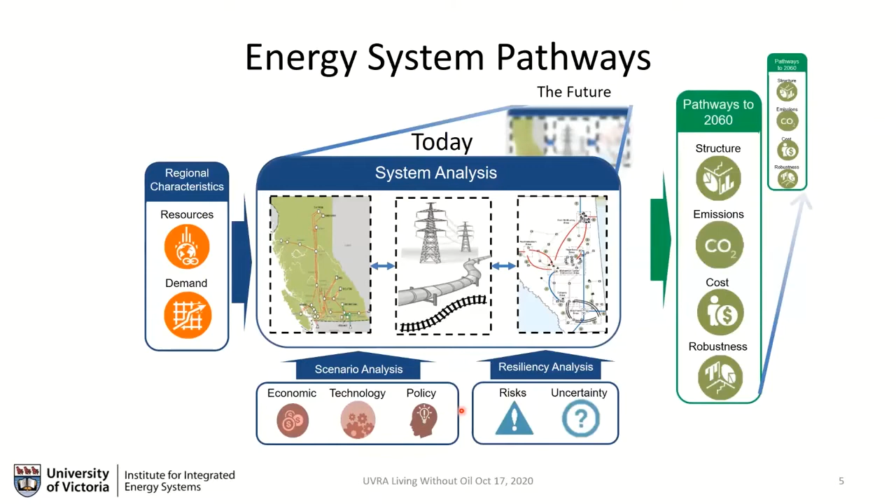And then we use some fairly complicated models to say what happens when I want to go to the future and I want to get to some future state with some defined constraints around options that are available. And what we would like to get out of this is some idea of what the emissions look like, what's the structure of the energy system, and how resilient is this structure that we think we want to build, and of course what is the cost. And cost is just one aspect of the value or the benefit that we might get.

And the unique aspect about electricity as compared to some other currencies or some other vectors for energy and materials is this need for this nearly instantaneous match of supply and demand. So I'll come back to this again. This is where storage obviously falls into the equation.

So then we need to think, okay, if this is what people want, how do we deliver it? And we need to start to characterize the behavior. What is this demand like? And the idea is basically what we build that goes from our switches in our house back to the generation, we don't start at supply, although that's the direction of flow of energy. Really, the system is built to reflect what the demand is, or at least it should be if you're delivering what people want.

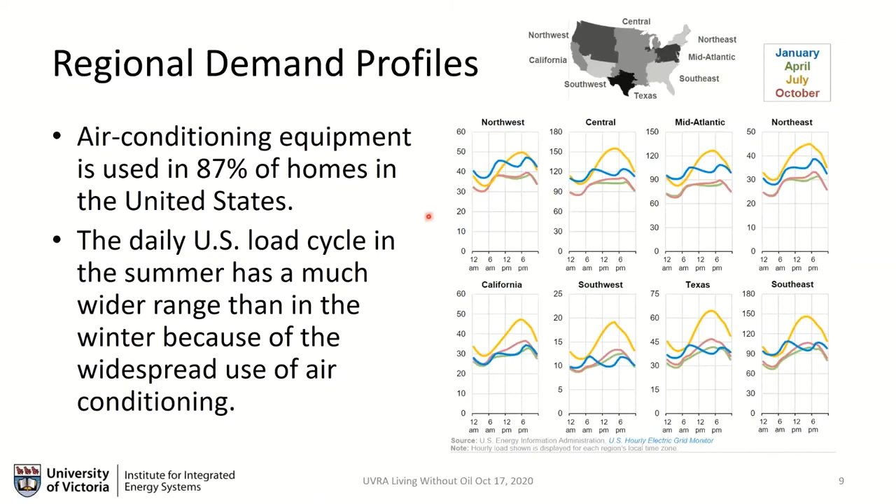So let's build this up a little bit now in complexity. Basically what we have is this demand profile that I've talked about. We have some supply options, supply being resources that we can access, and we build a bunch of technology and connect it together to make these things match. Now, as I said, one of the tricks with electricity is we need instantaneous matching.

Now, how do we start to down select, right? And so what I've said is, what if the cost of A is equal to B? And why am I saying this? Because part of the discussion we hear is usually around specific single generation technologies and their levelized cost. Levelized cost being, let's just look at this individual thing.

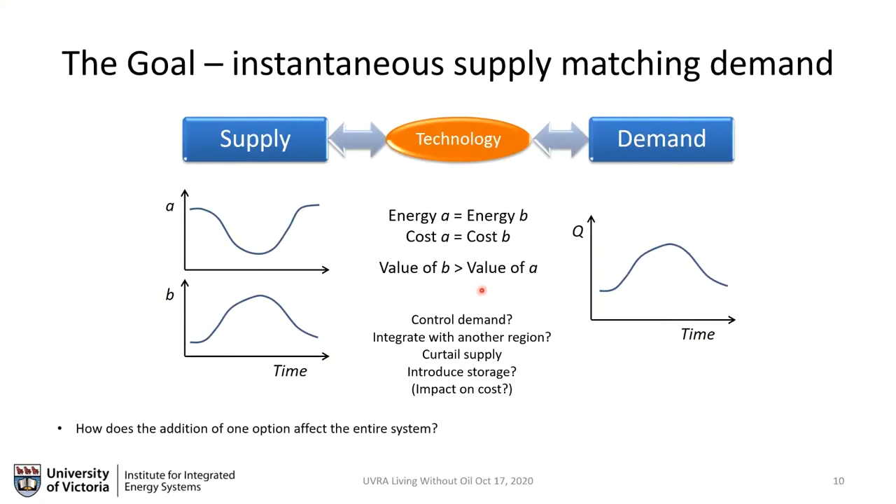What's the economic structure? Do you have a lot of a particular type of industry that has a certain profile, like us with mining and pulp and paper and forestry? That's some big demands with certain profiles. Your commercial breakdown. Of course, residential is a really important one. We'll come back to that. And so I want to meet demand, and I can imagine some wires connecting to these various loads and going back to what we might call the grid. And the grid is a large number of conductors with some power conditioning equipment and connectors, right?

And so where do I get it from? Well, if we're in BC, I have a connection to Alberta. That's AESO. So we can do some trade, or we could buy some energy from Alberta if we want to. Maybe I should build that link even bigger, take more from Alberta. They probably like that. We have another, much stronger link than the one to Alberta that goes south into the United States, to a point typically called Mid-C, the Mid-Columbia trading point. And then, these are outside jurisdictions, well, if we stay within the province, what do we have?

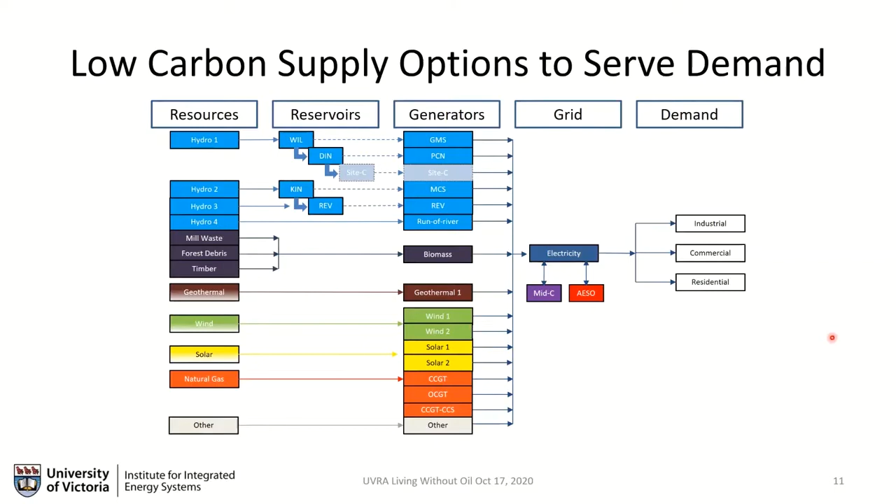Okay, so you'll see this VER, variable energy resource, show up now and then, and this is a term usually meant to describe typically solar and wind these days, but variable renewable. So it's a renewable that has some variability, unlike something like geothermal, which tends to be a fairly steady supply if you build it. Okay, so if I have this demand and I've decided I'm going to use some renewables, the question then becomes, what's the balance I need to build?

And to figure that out, we typically start to look at what's left over, or what's called the residual load. So if I take this load here and I've decided I'm going to build this particular combination of renewables, I'm just going to subtract this from the demand, and now I need to serve what's left over. Okay, so that would be the residual. So I've got my residual, and we often talk about a load duration curve. So if I take this information, I can order it from the highest to the lowest. And this is what's called a load duration curve.

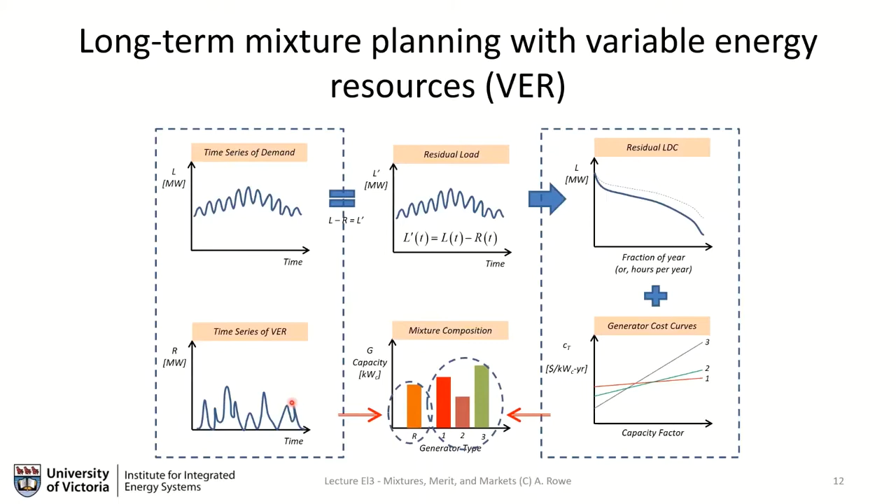Okay, but you could go through and optimally come up with what's the mixture that would give me the least overall cost. And that's what we end up with in the end. I've mandated, or I somehow have a policy, or a choice, or maybe it's existing already, like with hydro. I've already got this amount of renewable generation, and now to meet that residual, I'm going to install some mixture of some other technologies. And this is what I get.

Once you have that information, you can create what's known as the supply stack. And I'm showing you here an actual picture of the supply stack for Alberta from 2017. Okay, so instead of 3 technologies, you're going to have a lot of technologies, maybe similar types, but they have different operational characteristics, different costs because of their age and their specific details. And so you can create this supply stack, which is basically looking at all of the different generators we have in our mix. You order them from the cheapest operational cost to the highest.

And so then a very simple way to run it is to say, I just figure out where my demand is. Right now in Alberta, I could go and look at their website, and it will probably say something around 8 gigawatts. According to this supply stack, the best way to serve that 8 gigawatts is I should dispatch, or I should have everything to the left running and serving the load.

Tonight, when the load's gone up because everybody's making dinner, I'm going to be moving to the right. And as I do that, I'm getting into other generators I need to call on, and they're more expensive, right? That's because we've ordered this from least cost to most expensive. So then I get into some things that are going to cost more. And the way this wholesale market or the electricity market typically works is whatever that intersection is, that's the price of electricity that everybody's going to pay. So if I'm down here, I'm going to receive that payment, and that means I'm making a little more profit on top of this cost.

The other thing I wanted to point out, which is interesting about Alberta: typically a supply stack should start at some number down at 0 and go up, up, up. If we look carefully, this curve is actually not starting at 0. We're not down at the very bottom of the supply stack. We're already way up around 6 gigawatts, but it's at 0. In this particular time in Alberta, there was 6 gigawatts of generation that was essentially 0 cost.

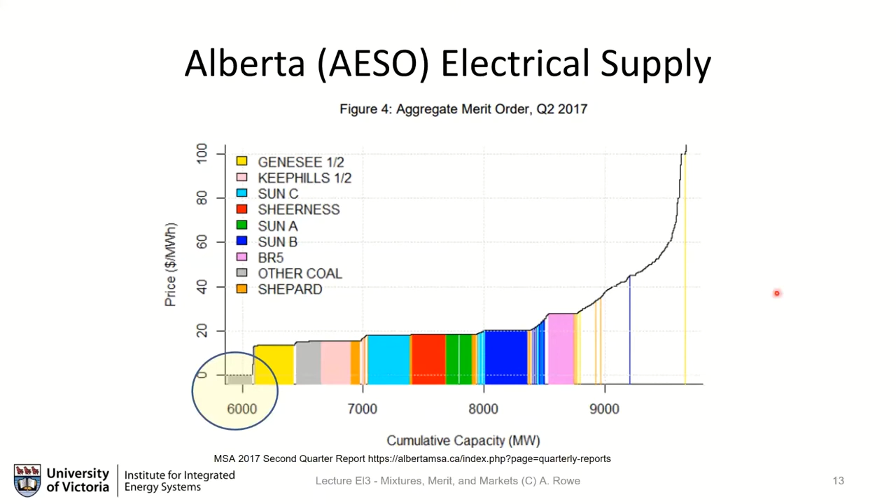Okay, so that's one of the benefits that comes with a big interconnected system, the exchange of energy, the reliability benefits that come with that. And historically, when we built electricity in North America around the turn of the century, not this past one, but the one before, we essentially had thousands and thousands of small generation units that serve their local town or city. And over time, we started to connect them all together. And that connecting was basically the least cost way to provide highly reliable service.

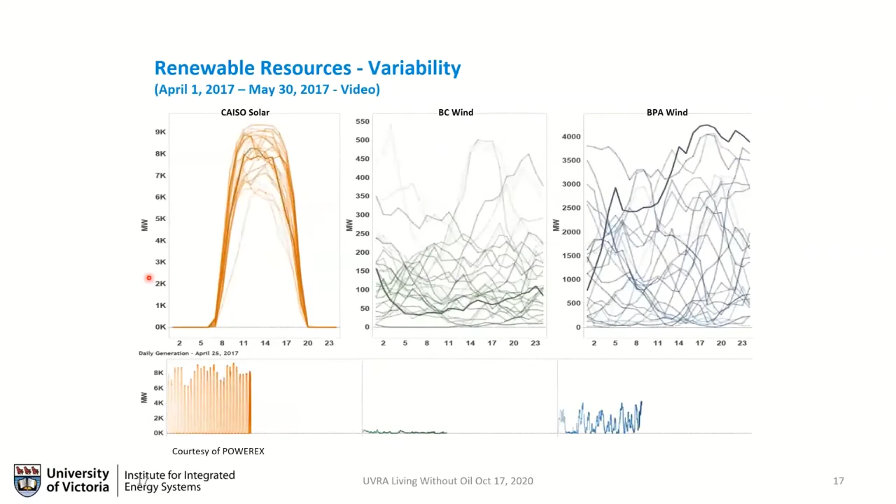Okay, so we can see going through, oh sorry, not a year, April to May. It's showing each day overlaid upon the next day. And we've got the absolute magnitude of these resources, their productive profile. And by laying one on top of the other, you get a sense of this variability. And variability, there's nuances to it, of course, and you can see right away why.

We know solar is variable, but it certainly looks much more predictable than this center plot or the one on the right, right? When you look at this 24-hour snapshot for this duration, it's hard to see really any pattern there. Things come and they go. And down below, you can see actually the time series, right? And it's quite a small signal here because of the low amounts.

Look on the right, though, you can see some big changes. Again, remember, we're talking about 4 gigawatts, which can show up and disappear very, very quickly. Solar, you see some definite variability in here over this time period. And remember, this isn't a full year, it's only 1 month. So we're really only capturing a month of variability. But of course, with solar, you know it's not going to be there at night. So that's those missing pieces there.

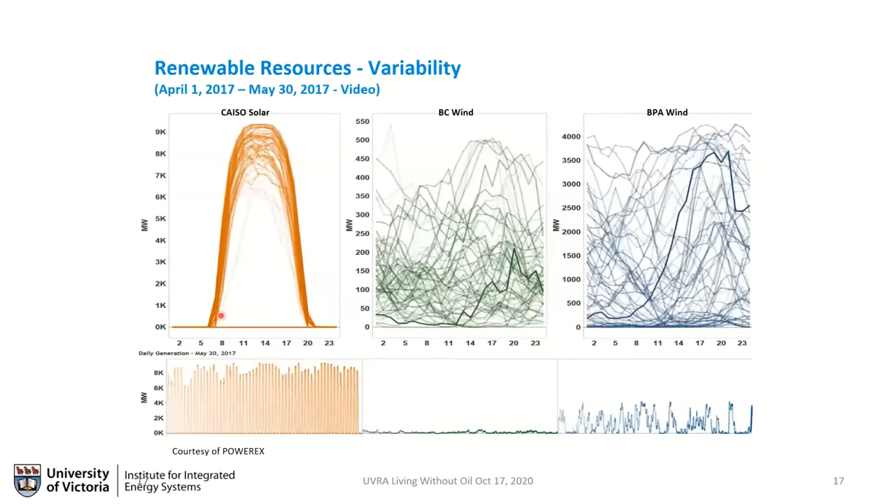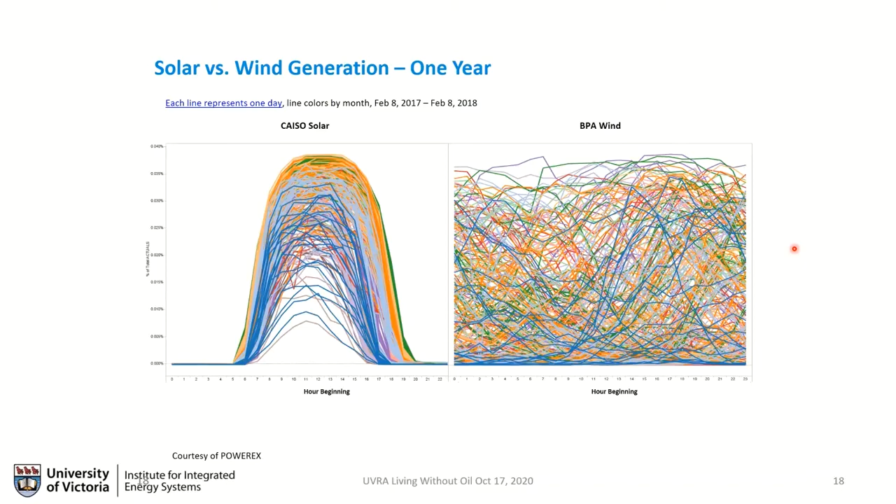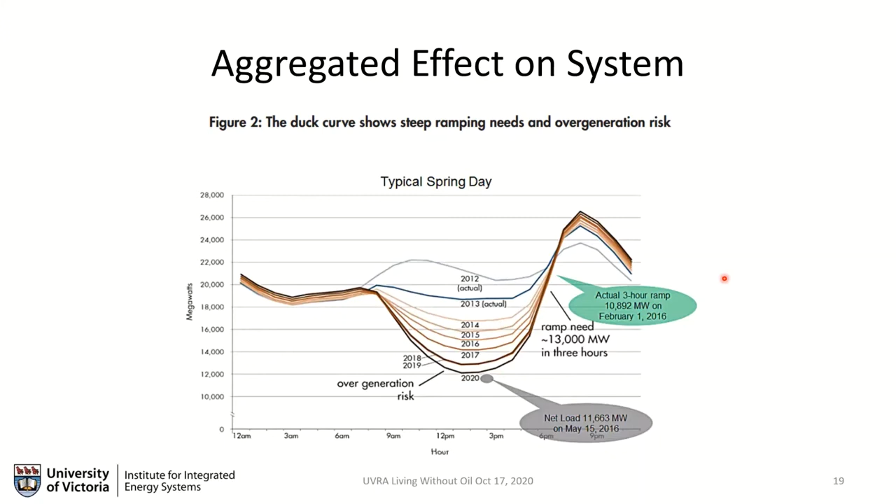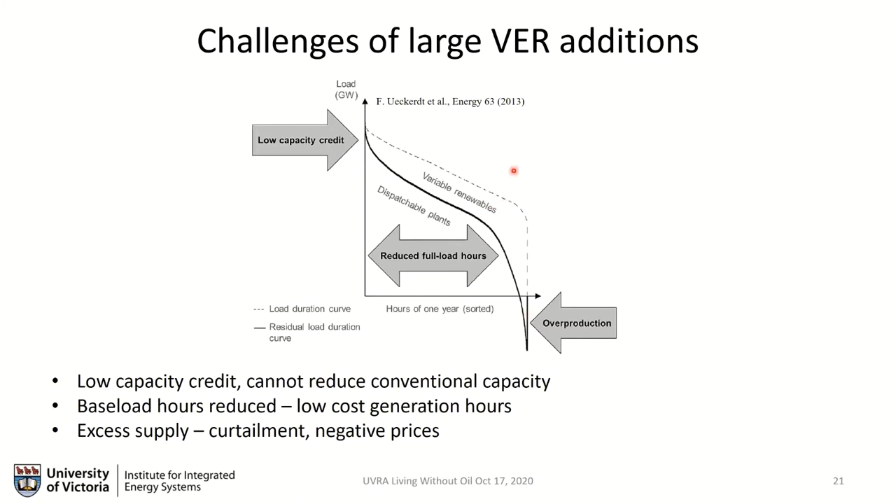If you really push hard, you can get to this place where you actually have so much renewable, you've got more than you possibly could, and you've got a negative residual load. That's overproduction. And in 2013, this was somewhat theoretical, but it's not anymore. And I'll show you some figures on this.

Electricity systems are large integrated systems. So what we really should be talking about is the larger interconnected network; that's just the reality of it. And picking some little boundary, a country boundary, is somewhat arbitrary when it comes to electricity, because the electricity does not observe the boundaries. Electricity flows wherever it wants to based on our connections.

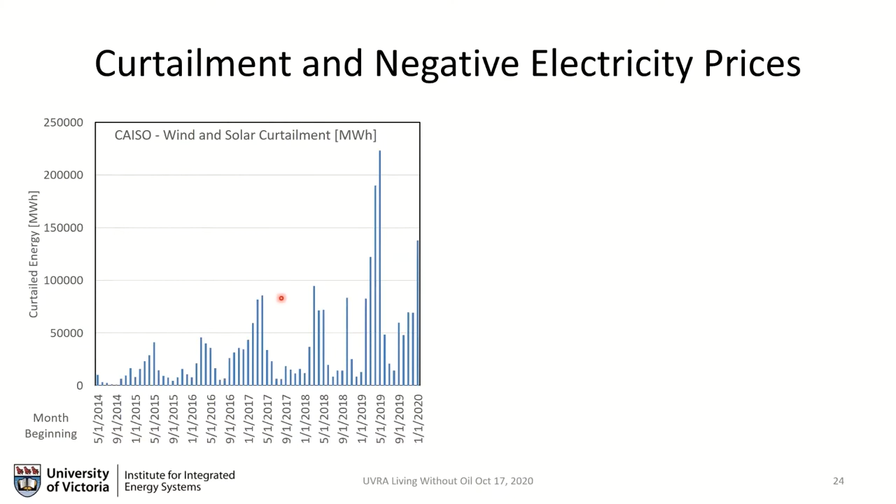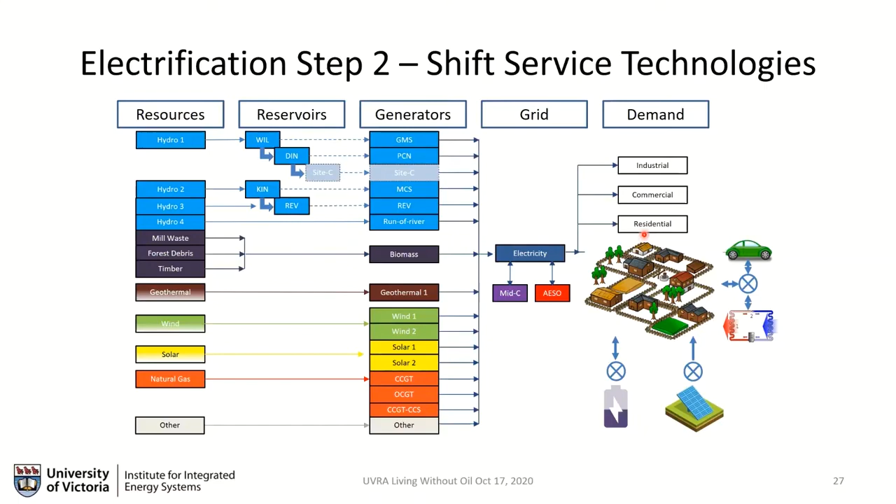So what does this mean? I've just said we've got pretty clean electricity, so let's use it to decarbonize. What does it mean in terms of additional supply or demand, and also the type of demand? What is the shape, the profile? Because we know that's very important for capacity. I'm going to focus again on our western part of the country. I'm showing here Alberta and BC.

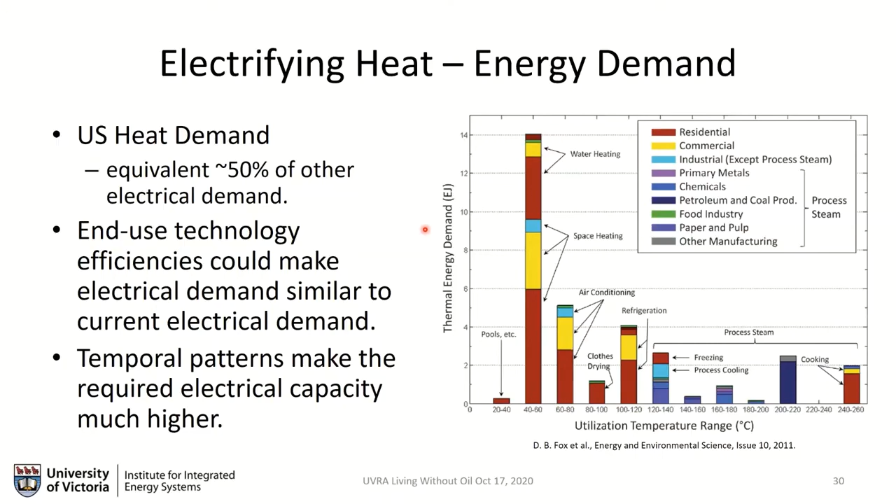And in pure sort of electricity equivalent terms, this heat, if it were to be completely electrified, is on the order of magnitude of existing electricity demand in the US. Okay, I'd say equivalent to 50, but then this is just the end use. And so if you actually have some efficiencies between the end use and the generation, we're talking about additional generation roughly the order of magnitude of electricity demand in the US. So, I don't want to sound scary, but these are some big numbers, and we got a lot of opportunity to get at those through electrification.

I've just shown you some rough energy numbers, but we need to get the profiles, because this is a key part of the cost. How much equipment, how much transmission infrastructure do you actually need to have? And that is hard to figure out, but it means you need to have some dynamics. You need to see how they correlate and aggregate and add up. And then how does it reflect what you have access to through trade and through your jurisdiction? And so just doing the residential side can be challenging, just because there's so much uncertainty around the types of technologies that we will be having at the residential scale and what their performance characteristics will be as we move forward.

So yeah, make it work. And I think I've already touched on some of the issues here. You know, this controllable supply. Well, we're trying to get into resources which are pretty hard to control, and we need to pay for them. We need to pay for the balancing and the dispatchable supply, possibly control demand. There are ways to do that, and maybe to incent it. There's issues around accepting that though, and defection of customers from the grid is one concern. And then there's trade, stronger interconnections, making use of neighbors. Maybe they've got energy or demand at different times, and so that can work. And then, of course, a technical solution to a lot of what we've just talked about is storage. And that will be part 2.